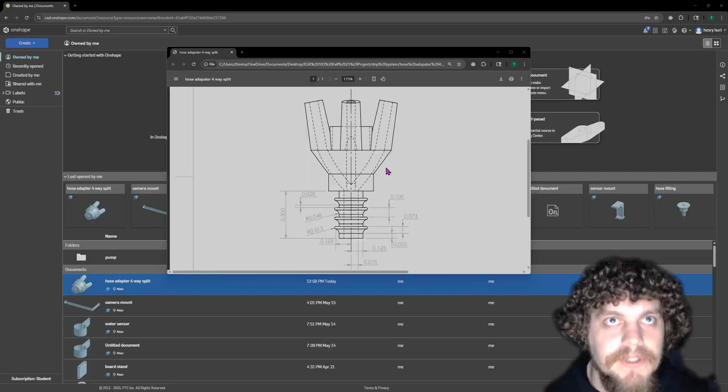I'm an undergraduate TA here at UK with the FYE department, and today I'll be showing you how to add the barbs onto the hose adapter with a four-way split for the drip system for the hydroponics project.

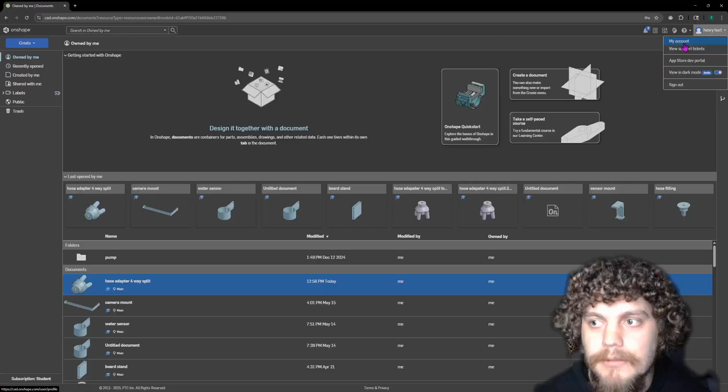If you don't already, make sure you go ahead and open this drawing up so you can have all the dimensions, and you should be given the link to this part. Go ahead and open that, and once you have Onshape open, go to My Account, then Preferences, and make sure this is set to inches if it's not already. Then go back and open up that part.

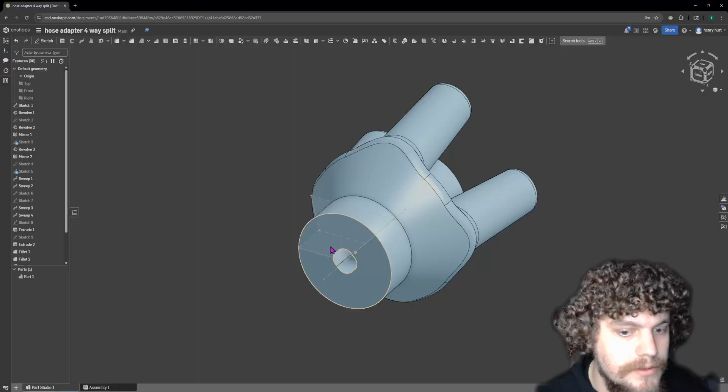You'll want to make sure you have this Sketch 1 right here. Make sure you show that, so you should see that sketch right there. You don't have to, but I have these planes hidden just because I like it like that, but it's totally up to you if you want to hide those or not.

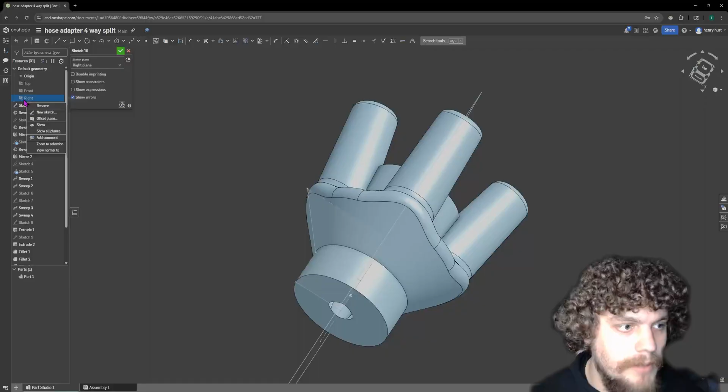Go ahead and click on the right plane, then click sketch. On the right plane you can click view normal to—sometimes it might do it weird—or you can just hit N on your keyboard and it'll automatically go to that.

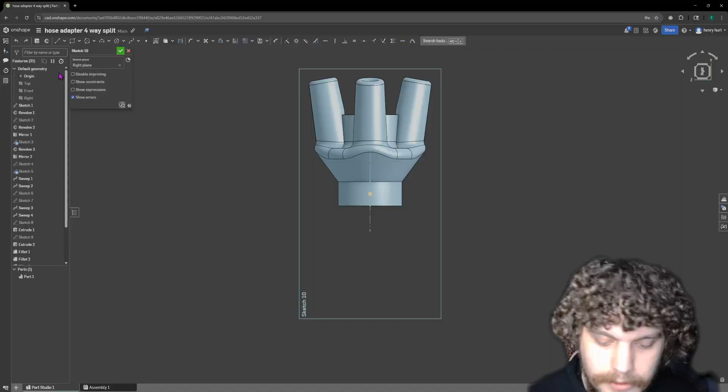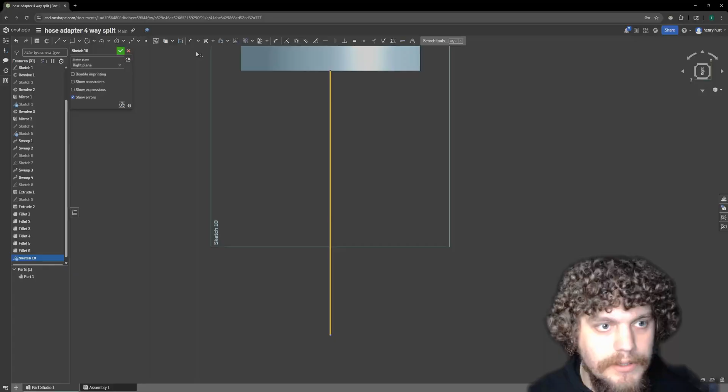First we'll want to go up here and click line, or hit L on your keyboard—I think it's easier that way. Go up to this little point right here and drag it down. Then left click on this line, go up to construction, and click that to turn it into a construction line. Hit D, make this 0.5, and hit enter.

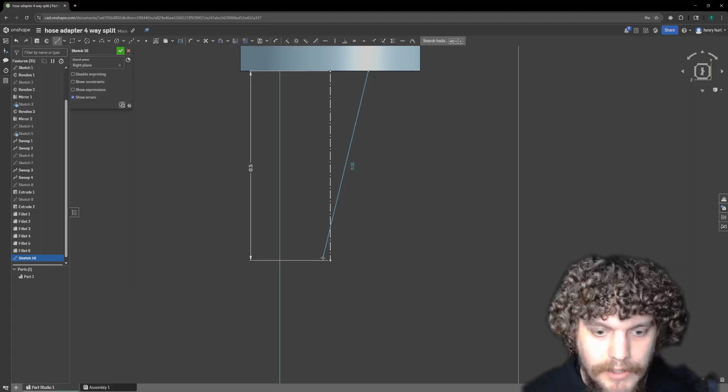Hit L again, highlight this midpoint, and drag over a little bit, then drag it down. You'll want to hover over the endpoint of this line, hit D, then left click on this line and this line and make that 0.075.

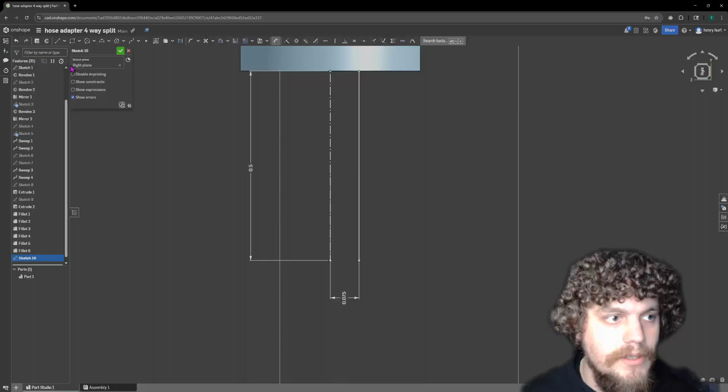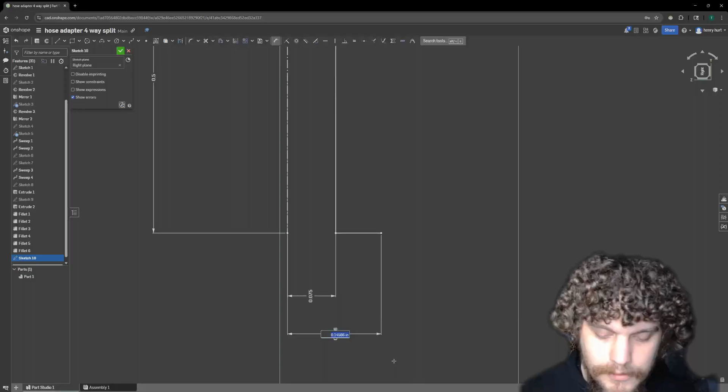Now hit L again, go from this endpoint and just drag it over, hit escape, then hit D and go from this endpoint to this endpoint and make that 0.125. Then hit L right here, hit D, and we're gonna make that 0.053. Hit enter.

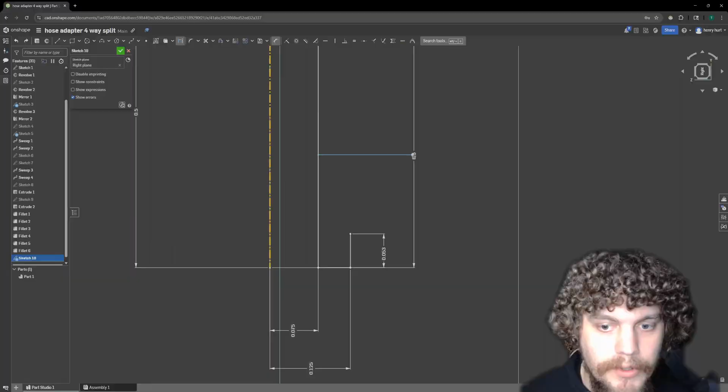Hit L again, hover over this line and drag it out, hit escape, then hit D, and we're gonna make that 0.158. Wait, sorry, ignore that—we're gonna hit D and go from this line to the endpoint of this line, and it's still 0.158. Hit enter. Then hit D again, and from here down to this endpoint we're going to make that 0.073.

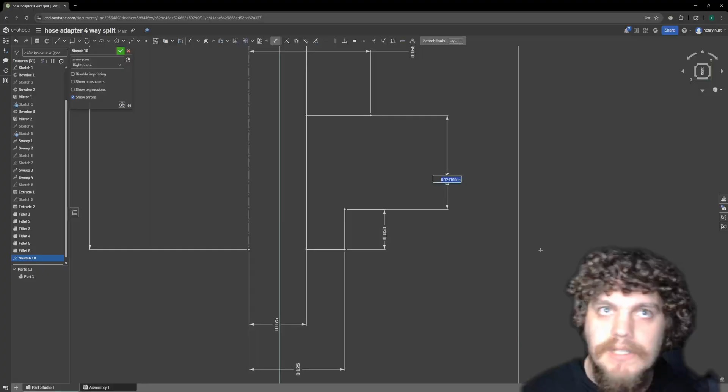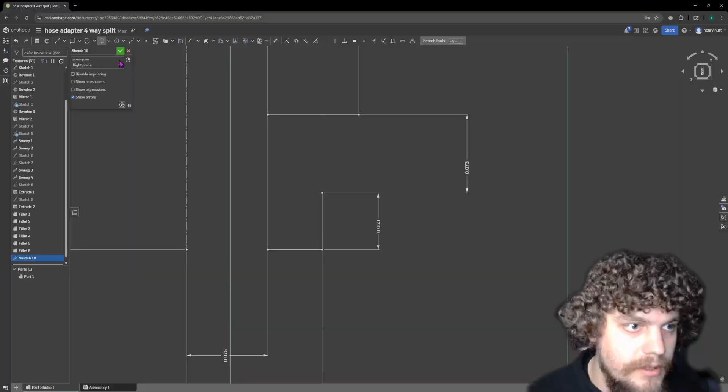Now you want to go up here and hover over 3-point arc, hit the little drop down, and do tangent arc. Click right here, and it should be even with that little point right there. Drag it down to wherever, then hit D, and we're gonna make that 0.013.

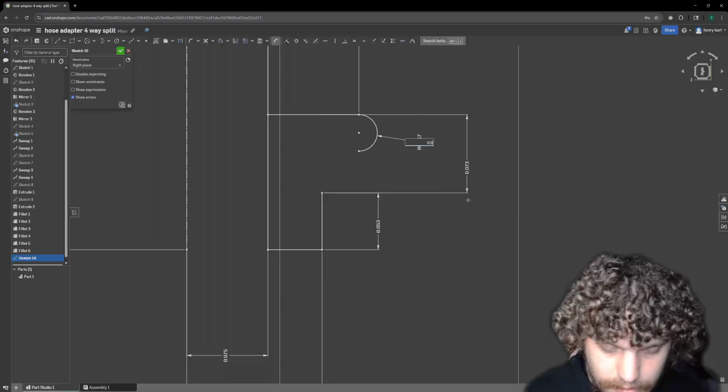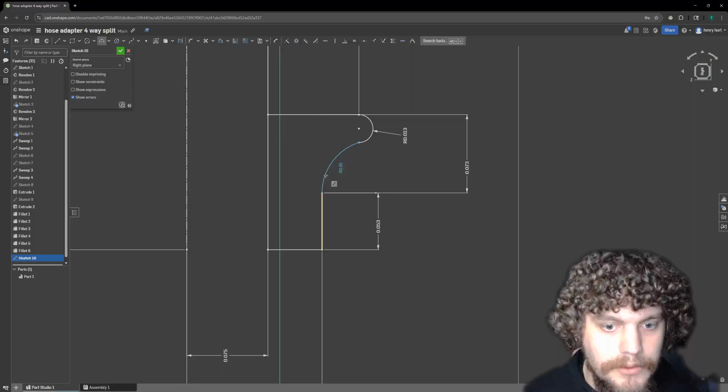Now we're gonna go back up to the arc, but do 3-point arc. Click right here, then click right here, and you should see this line down here highlight, with a little symbol popping up—that just means it's tangent. Then escape.

Basically we're just going to repeat this process three times. Hit L, click on this line, drag it down and hover over this endpoint so it'll snap, then hit D and make it 0.1. Hit enter. Then do L again, hover over this endpoint, drag it up to this line, hit D, and we're going to make that 0.028.

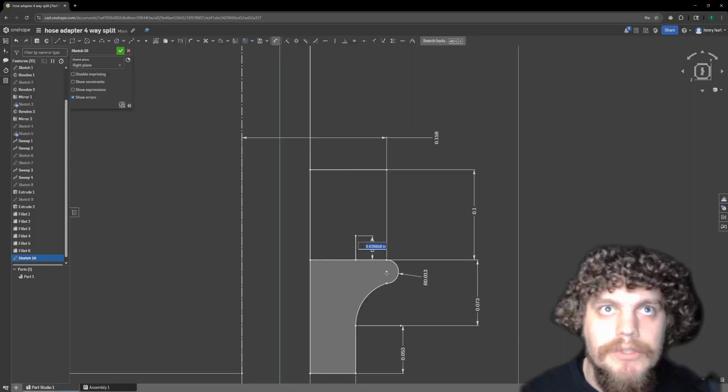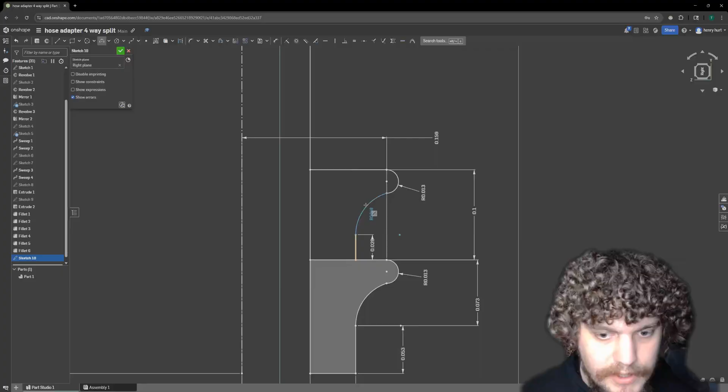Okay, and then same thing, we're going to go up to the arcs and do a tangent arc. Then hit D, set it to 0.013, enter, and then go back up and do a 3-point arc from here to here. You want to make sure you see that tangent symbol pop up.

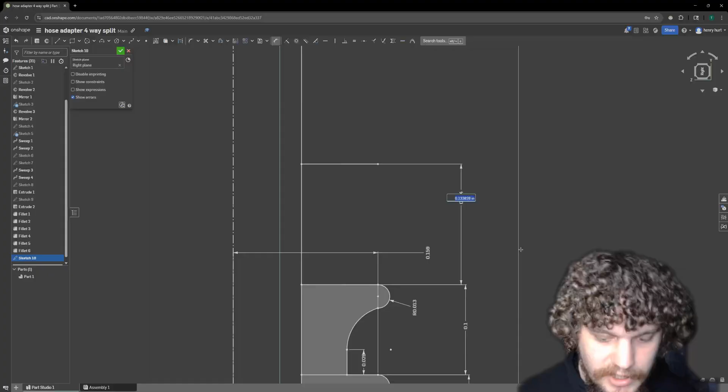Okay, escape. Same thing again. Do a line, drag it out from here, hover over that endpoint, then hit D, make it 0.1 again, and then line again, so hit L and hover over this endpoint down here.

Just drag it up here to this line, and then hit D and make that 0.028. Enter, and then same thing, go to the arcs and change it to tangent arc.

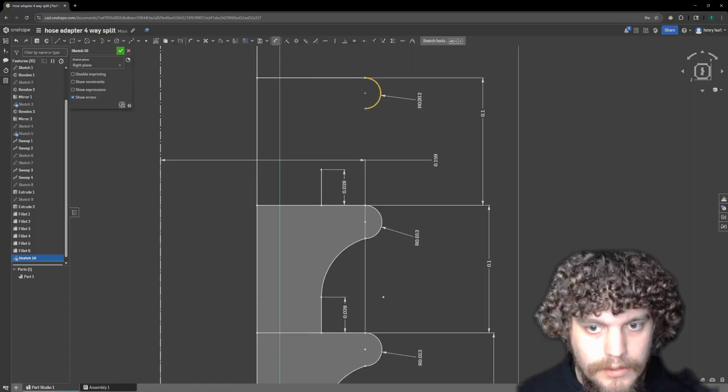Escape, and then hit D, 0.013, and then change it to 3-point arc. Make sure that little tangent symbol pops up.

And line again. Drag it out from this line, hover over this point so it snaps. There we go. And hit D. Make it 0.1. Hit enter.

Okay, and then L again. Hover over that point. Hit escape, and then hit D. Make it 0.028. Hit enter.

Okay, and then same thing again, but do tangent arc. Escape, and then hit D. Make it 0.013. Hit enter. And then change this, or sorry, not circle, arc.

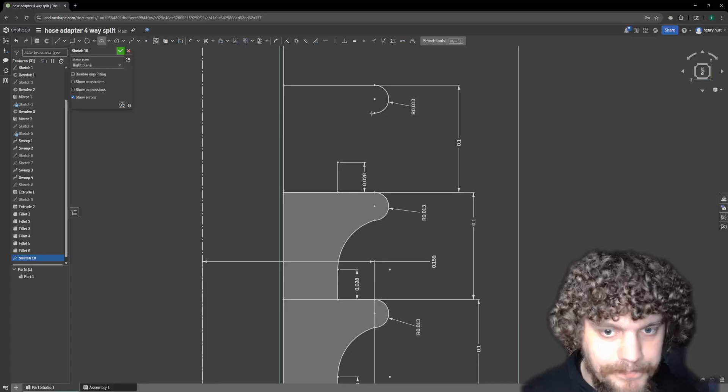And then change it to a 3-point arc. Click right here and down here. Make sure the little tangent symbol pops up.

Okay, and then we just gotta close this surface off. So hover over that point, and then hover over this point right here. And then do another line from here to here.

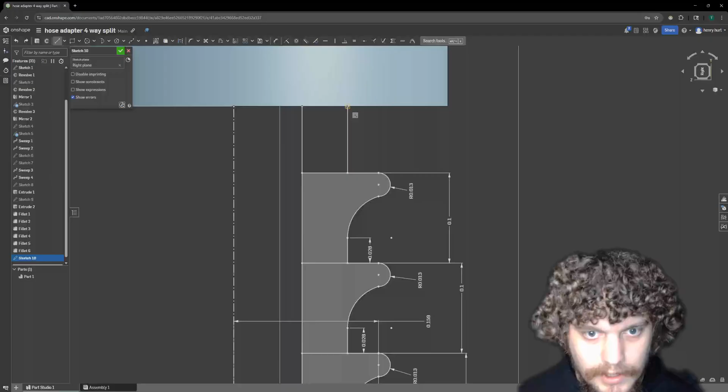Okay, so now we just need to trim these little line segments off. So we're going to go up here and do the trim symbol. Trim that, trim that, trim that, trim that. Okay, there we go.

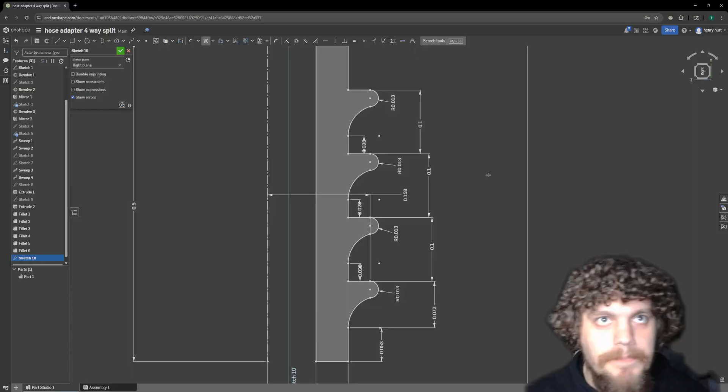And you should see, if you've done this right, this surface should kind of be highlighted. If you've done something wrong, like you're missing a line, it's going to look like this, and you don't want that, because when we try to revolve this, it's not going to work right. So make sure it looks like that, and then we're going to go up here and hit revolve.

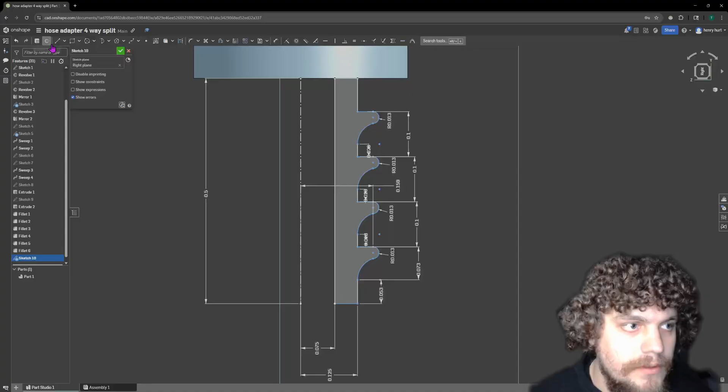Make sure you don't hit extrude, hit revolve. And then you need an axis to revolve around, so click on that, and then go to this construction line over here and click on that. And then you can see now we've got our barbs to grip onto the hose.

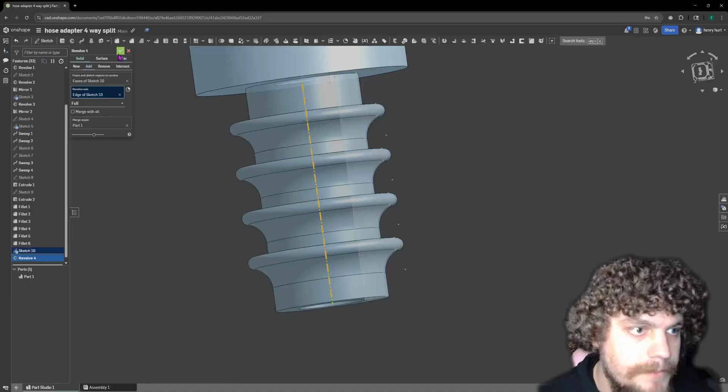And then we're just going to click check, and you want to make sure this says full. It should default to full, but if not, make sure it does. And then hit check, and then there we go.

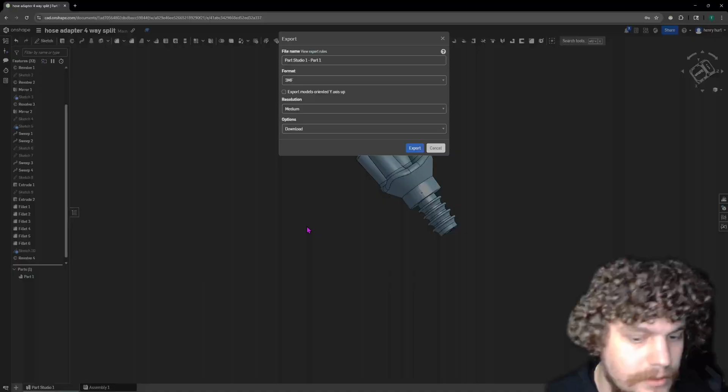So now you're basically ready to print this, so go ahead and go to where it says part 1, right click on it and hit export, and then make sure it says 3MF, and then export, and it should be in your downloads. If you're going to print in the Innovation Center, you'll want to save that to a flash drive and bring it there. Then go ahead and open up Bambu Studio.

They should already have it open there, but go to their computer where they have it open and put your flash drive in the computer. Sorry, it's going to take a second to load. Okay.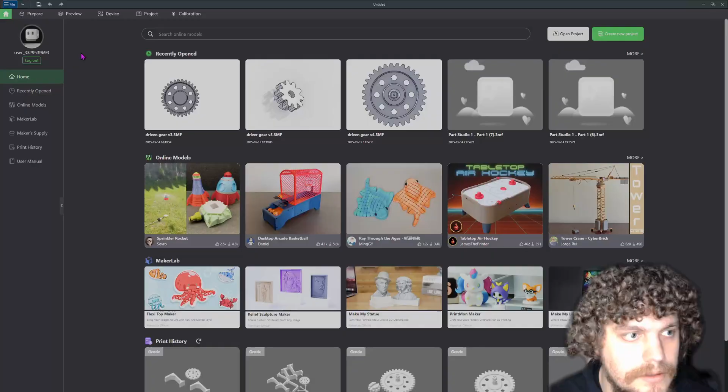Okay, and then go to click on File, click Import 3MF, and then just go to your downloads and go to wherever you saved it, probably on a flash drive. Sorry, I don't know why it's taking so long to load.

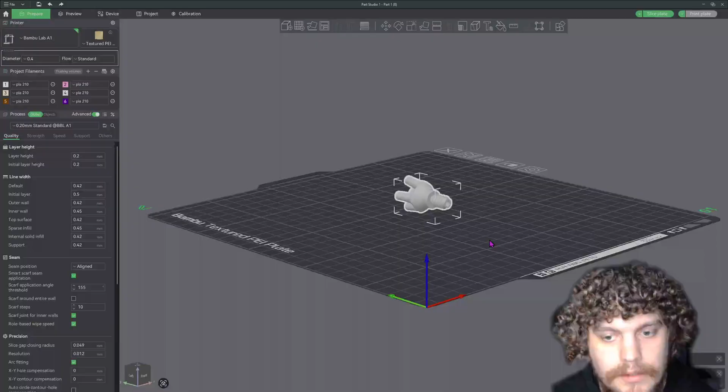Okay, and then it should look like this, and you obviously don't want to print it like this. So we're going to go up here and click Auto Orient, and there we go. Then you'll want to go to Support, click Enable Support, and make sure this is set to tree support, not normal support. And then slice it.

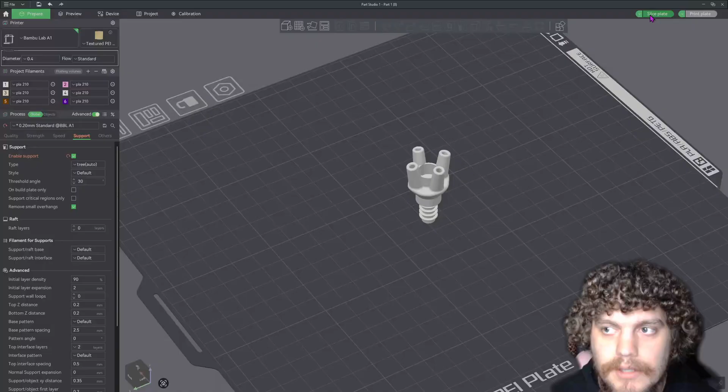And there we go. And then just hit print plate and pick whatever printer you're going to print on. And there you go. So I hope this video was helpful, and have a good day.